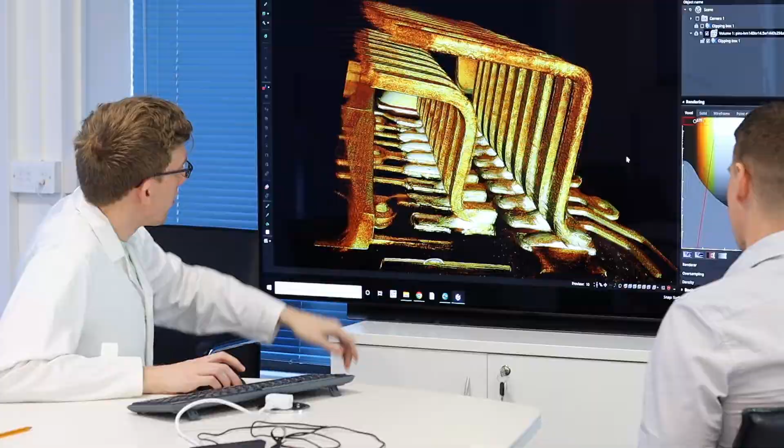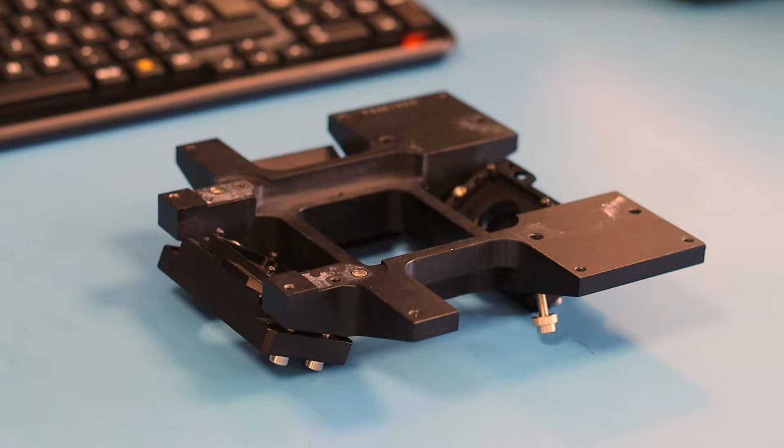Cupio Services is the on-demand provider of failure analysis, pre-production inspection, small volume quality control, and other types of testing and analysis work. We have the capability to perform a multitude of advanced diagnostics and imaging on materials such as plastics, metals, ceramics, or electronics. We find faults, or simply reassure clients that their manufacturing procedures will withstand the tests of time.

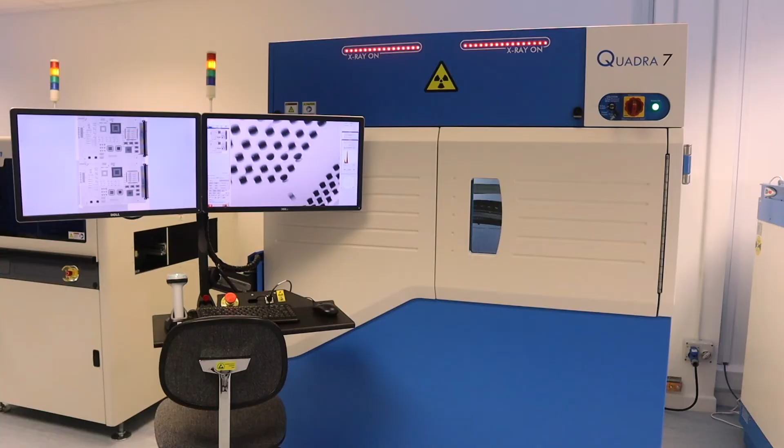Some clients' growing requirements for high volume or throughput will lead them eventually to invest in a Quadra 7 or Gen 7 themselves, benefiting from not only the equipment, but Cupio's lifetime product support. Up to that point, Cupio Services offers a cost-effective, quick turnaround for inspections, from a one-off to pre-production volumes.

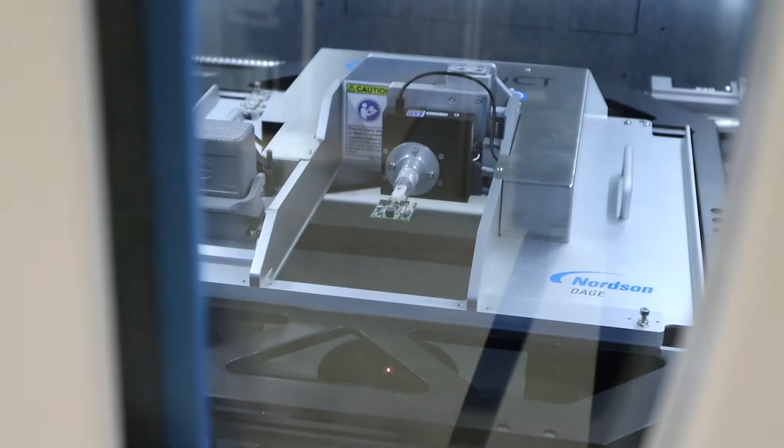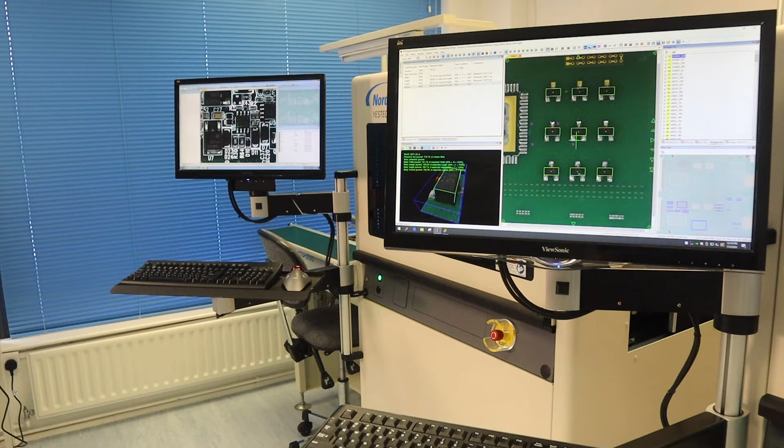Essentially, Cupio Services provide the ideal solution for companies not wanting to invest in the purchase of non-destructive test equipment to identify faults. Instead, they capitalize on both the expertise of the inspection team at Cupio and the vast array of equipment housed at our Basingstoke facility. With everything in-house, we can ensure the security of both the customer's product and data.

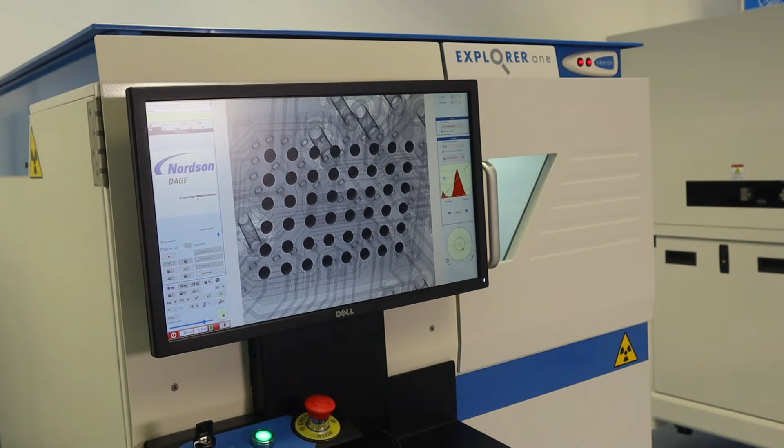At Cupio Services, we make the process as streamlined as possible. In most circumstances, our clients will engage in an initial discussion with our inspection team, which centres upon what they consider may be going on with their failed unit and what they want to see. Generally, our clients will have an idea of the equipment best suited. However, we do consult at this stage to confirm the most appropriate inspection method for the sample being inspected.

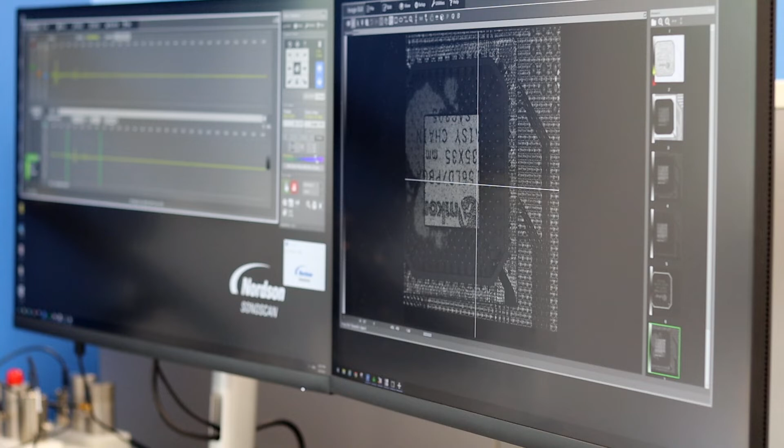Some applications, like complex failure analysis or counterfeit IC detection, require the use of multiple inspection methods. The complementary nature of CSAM and X-ray means they are frequently used alongside each other. At Cupio, we aim to provide quality inspection services at short notice. Our typical lead time is 3 to 4 days from receipt of samples.

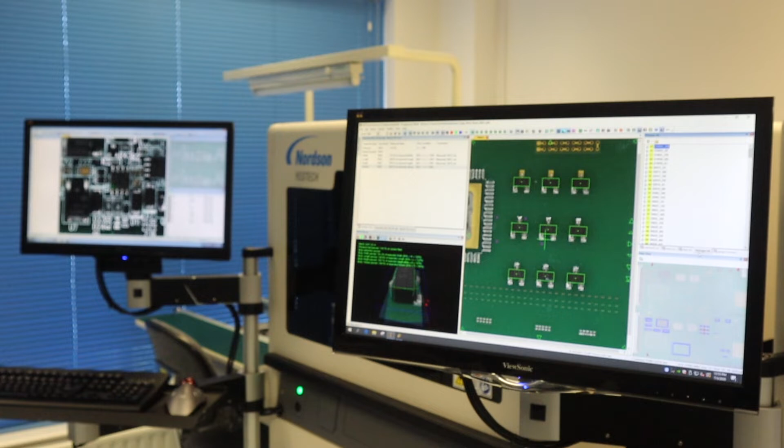For the purposes of this video, we've selected 4 very different types of samples to highlight the versatility and capability of equipment: a silicon wafer, a machined metal fixture, a power module, and a printed circuit board.

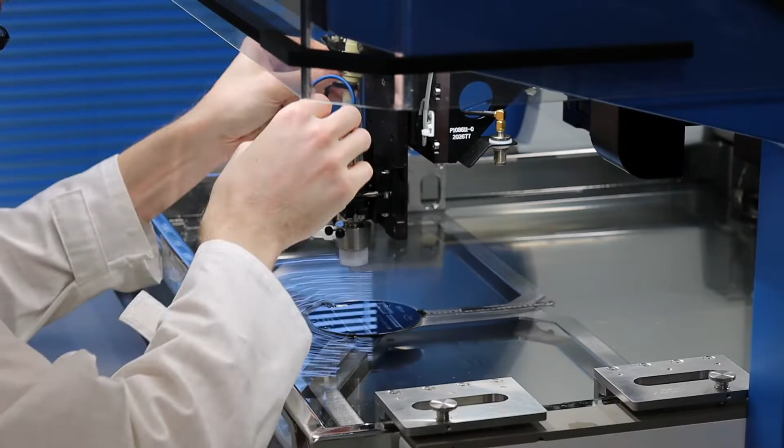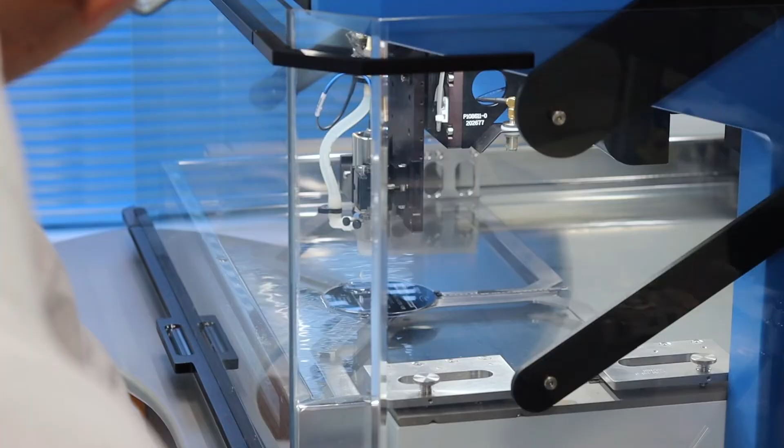Essential for manufacturing semiconductors in all kinds of electronic devices, silicon wafers are a common type of material tested here at Cupio Services. While metals deposited on a wafer can be imaged under high magnification X-ray, the separation of layers and how they are connected is very much a CSAM application. Our SAM systems have special wafer trays, and because the wafer scan tends to be high resolution and thus take a long time, we can deploy the waterfall technique to dislodge any bubbles that form, which would otherwise distort the inspection results.

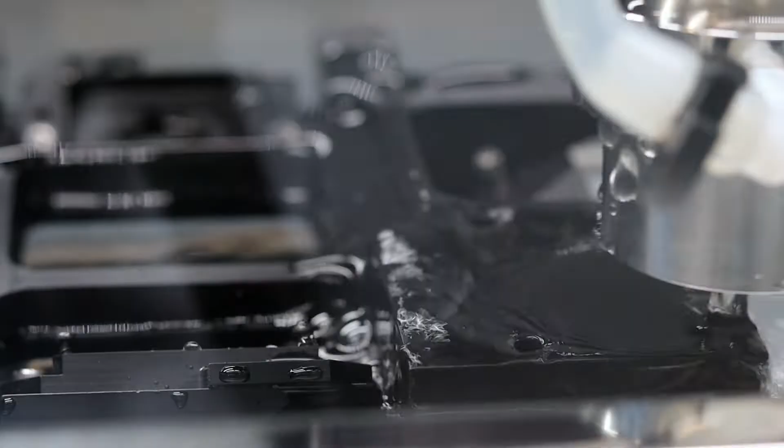Large machined or cast metal parts can also be inspected using CSAM. In this example, a crack is visible optically, and CSAM is used to confirm where and how deeply the crack propagates. The combination of a small crack within a large and very dense part means X-ray isn't a viable solution. If the part is too large to be fully submerged, this isn't a problem. Here, the waterfall head is used, generating a stream of water that couples the ultrasound to the sample.

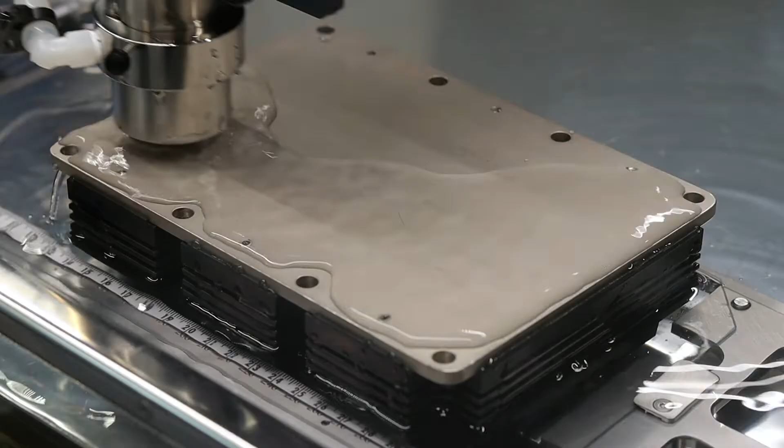IGBT modules are a key part of an electronics assembly for high-power applications. Inspecting these for voiding and delamination is vital to ensure the correct thermal transfer to prevent burnout of the components. For this application, we may need to keep one side of the unit dry, so we can employ the water plume technique to inspect the device from below without the top side getting wet.

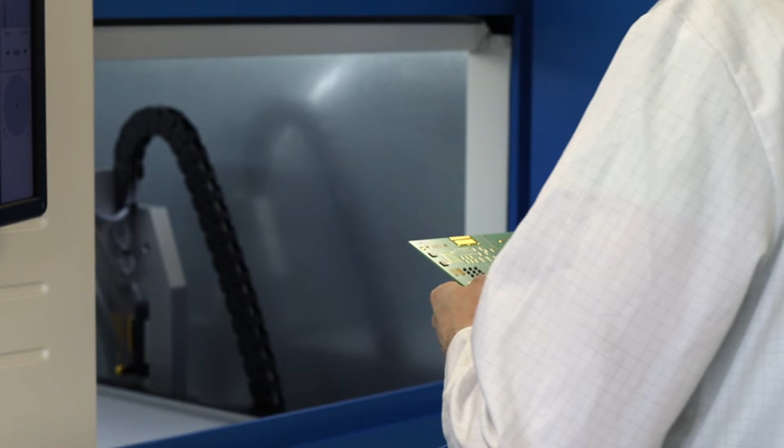Electronic circuit boards would most commonly go through an X-ray inspection route. Any solder connections not visible optically are commonly inspected. We can also conduct a CSAM test to check for delamination within the ICs and potentially delamination within the circuit board itself. Broadly, CSAM reveals air gaps, voids, and delamination in materials that X-ray cannot see.

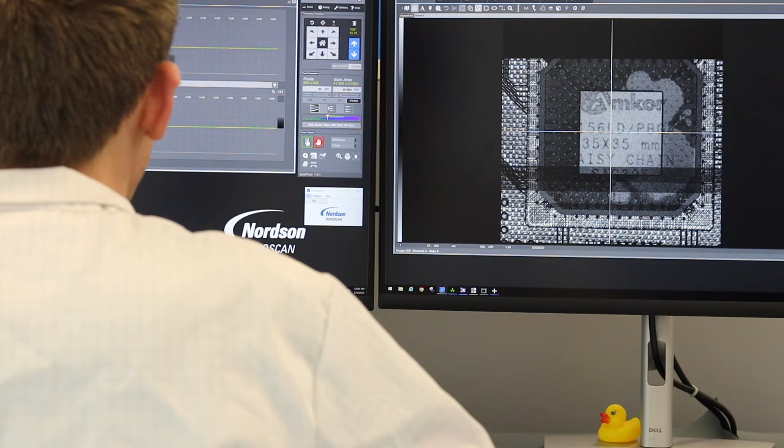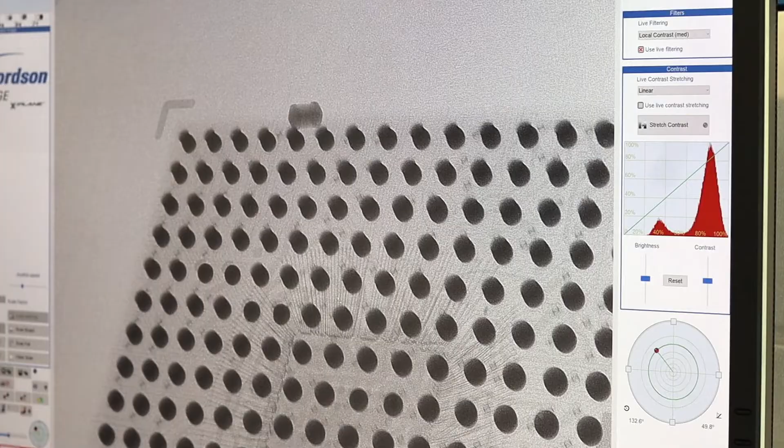For example, small separations between a silicon die and encapsulation material would be invisible to X-ray but are easily seen in CSAM. Conversely, BGA voids are difficult to visualize with CSAM but easy with X-ray. As you can see here, the circuit board has been selected for X-ray inspection using the Nordson Quadra 7. Product safety is a priority for Cupio Services, so ESD precautions are in place to eliminate possible static damage. Non-destructive inspection methods that generate high-resolution fault images are essential for failure analysis.

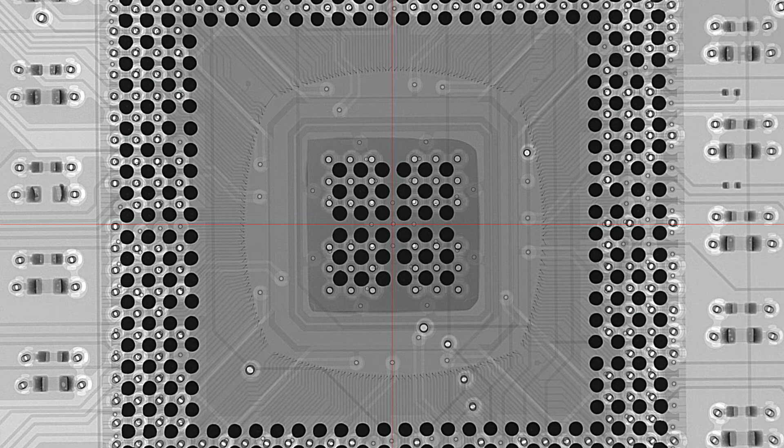The final stage is to relay our findings to the customer. We can produce comprehensive reports or simply provide images. Often, a discussion is more suitable, and we'll talk through the findings with you. This is especially relevant for CT, where the result is a 3D model. We can do this both in-house and virtually.